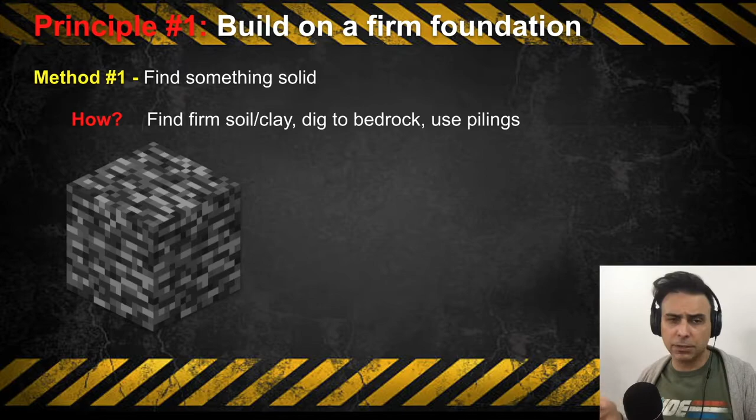So we could dig to bedrock. Oh, sorry, not that bedrock. This bedrock here. And as we can see, we have our layers of soil here. It gets more packed. And then we have our bedrock here. Let me get my pointer up. We have our bedrock here. And this is solid stuff. You can't build on anything more stable than that.

We could take off that top squishy layer of soil and build on the clay underneath. The soil in our area is very clayey. If you ever had to dig into your backyard for a project, it's a pain in the butt around here. But it's nice and firm to build on.

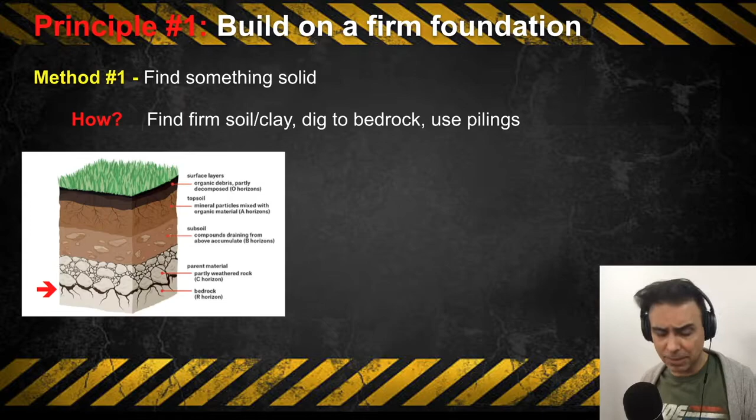Now, the other thing we have are called pilings. So these are pilings. They could either be concrete or metal, or sometimes even wood is used. And if you can't dig to bedrock, you can put these down onto the bedrock and then build on top of the pilings there. And then that force is holding onto that without actually putting the foundation on the bedrock.

Because sometimes the bedrock is under hundreds of meters of soil. There's lots of dead things that have decayed and piled up on top of that bedrock after a couple hundred million years.

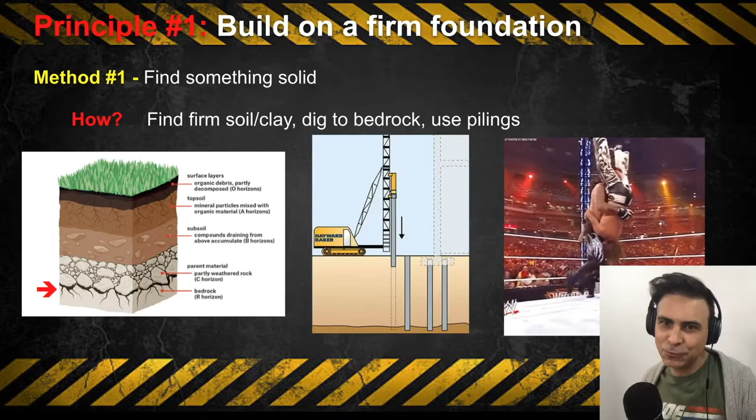So you may recognize the word piling from the wrestling move, the pile driver. This is technically the tombstone, but it's actually a pile driver. And look, here's how it works. You take your opponent, treat them like a pile, and then drive them into the ground. And that's why this move is called the pile driver. If we were in class, I would demonstrate this on a student now so you fully understand what a pile driver actually is.

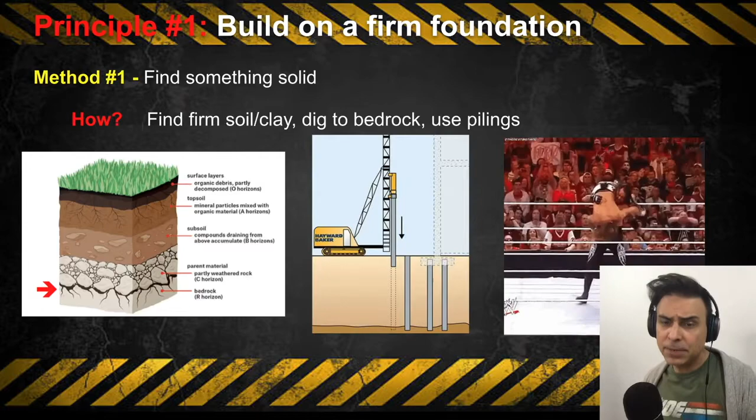But here's a real pile driver in action. They load the piling in here, and they use this pneumatic hammer to go up and slowly, boom, boom, drive it into the ground. It is loud if it's metal, and it takes a good long time because it's only moving maybe 5 centimeters each time. If you've got to go down a couple hundred meters, that's a long way to go.

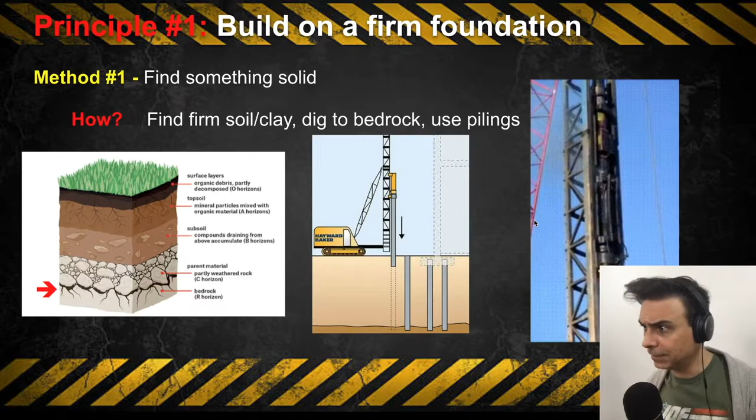So principle number one, build on a firm foundation. The first way you want to do that is just find something solid. Find a solid place to build on. Now, another method you could use for this is to simply make a solid layer. I want to build here, but there's nothing solid to build on. So you could make a solid layer.

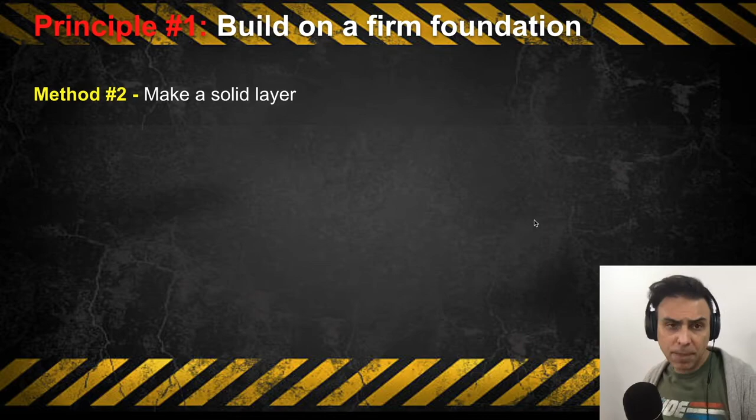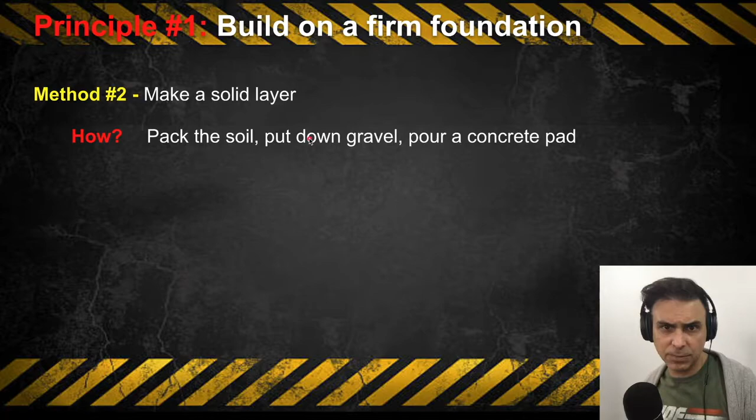How could you do that? Well, you could pack the soil, you could put down gravel, or you could pour a concrete pad. So you could actually make something there. And this is usually good enough for most of the structures that aren't super giant high rises or need to be ultra stable. So we have soil here, but we can pack it down so it's much more compact. The particles are much denser together, so when you step on it, it's much more firm.

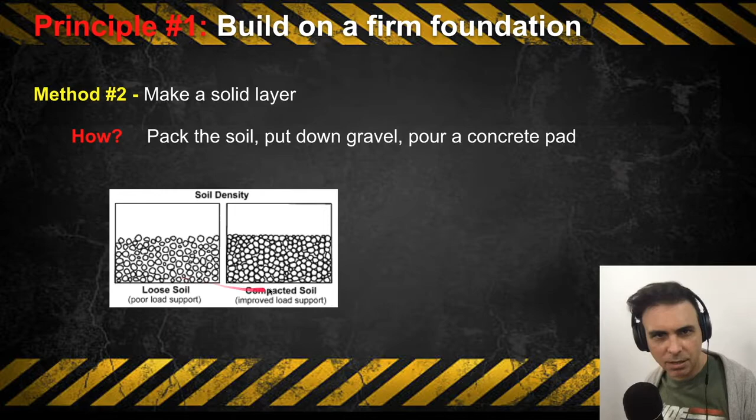It'll hold that energy. You won't sink in. Think of when you walked through a garden around your house and your parents are yelling at you, how soft and squishy that soil was, because it's not compacted. And we have tools that'll help us do that here.

So this is a tool. Look at that. They're compacting that in. No, that's not a Star Wars droid. They're just kind of pounding it down, making it firm, taking out all those spaces so it'll hold that load better. Pouring a concrete pad, very simple. Putting down gravel, again, very simple.

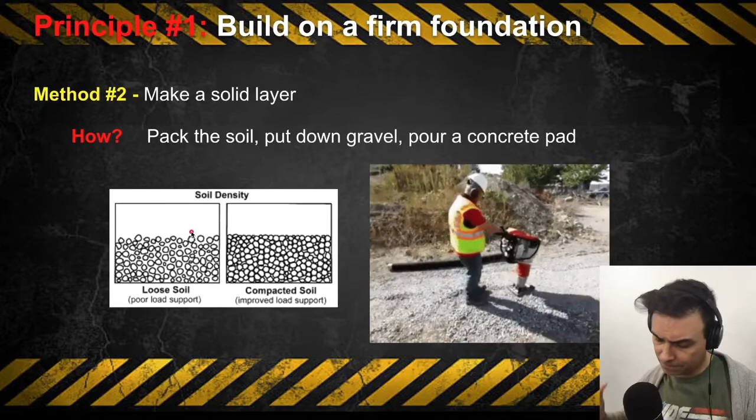And often on top of that gravel, you want to put sand, because the sand will then go in between all the particles and allow for a much more even distribution of the force as well. So that's method number two. Make a solid layer. And then method number three: you want to spread the load.

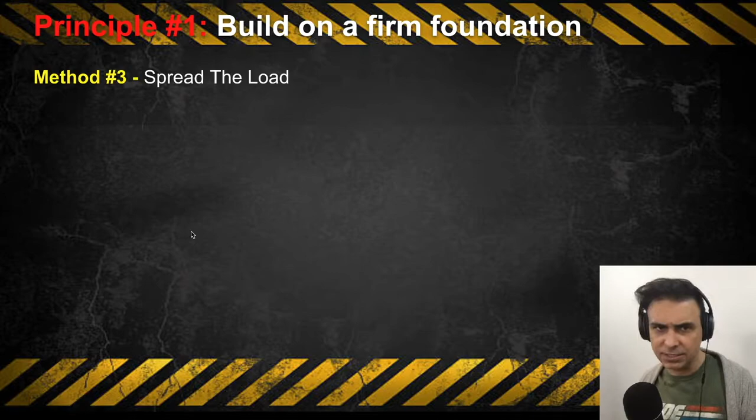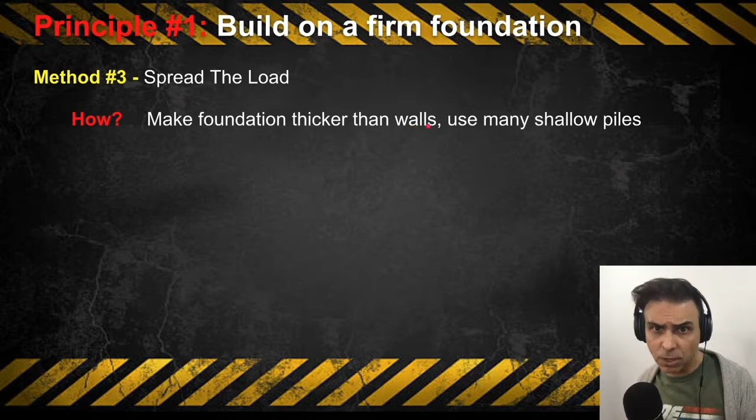This is the most interesting one because the first two you could probably come up with very easily on your own. But instead of having all the force go down to one spot, we could spread it out. So, how do we spread the load when we're building on a firm foundation? We can make the foundation thicker than the walls and use many shallow pilings.

Let me explain. So here we have a wall coming down here to this foundation, and look at that foundation there. See how it kind of spreads over? It'll spread the load. So instead of the load coming down right in this one spot, it's a bigger area that's being compressed.

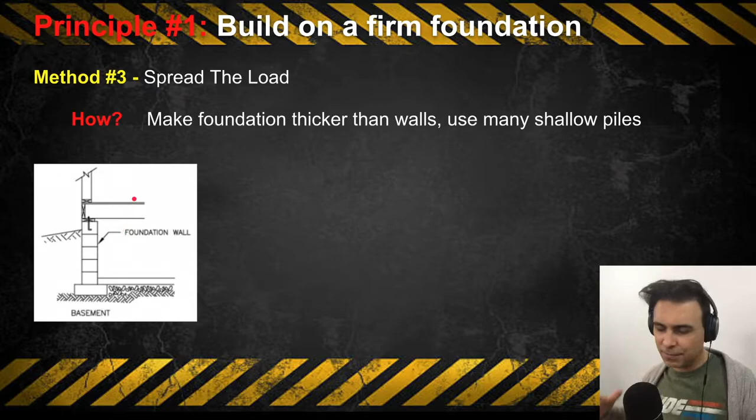And you can think of this, don't you hate it when you're walking across grass in high heels and the high heel keeps sticking into the ground? That's the worst. I hate that. And the reason is all of your force, all of your weight is down to that tiny little point. If you're wearing flats or have a bigger heel, that doesn't happen because the load is being spread.

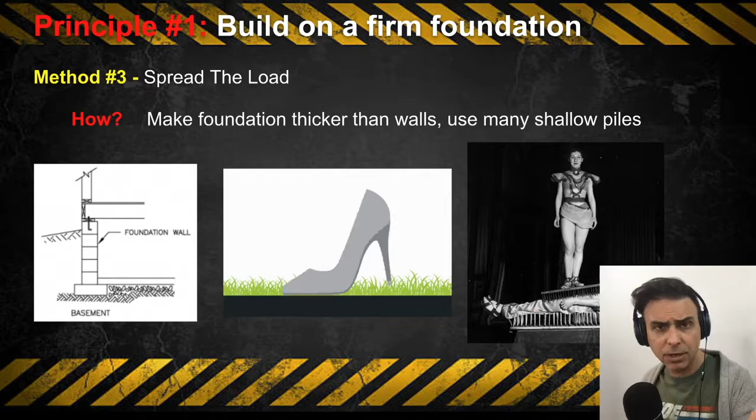And this is the reason why you don't die when you go on a bed of nails. I'm sure some of you have done the bed of nails at the museum in downtown Kitchener. And you got stabbed by 1,000 nails. Well, why aren't you dead? Well, because each one of those nails held a little bit of the weight.

If you asked a young child, would you want to rely on 1,000 nails or just one nail? They'd be like, oh, I don't want 1,000 nails, just one nail. But think of all your force on one nail as compared to a whole bunch. It just holds it. There's no magic involved in that at all. So that's what we mean by spreading the load here.

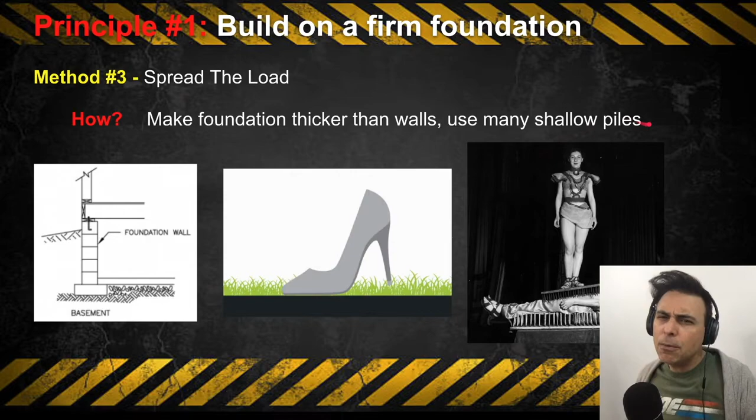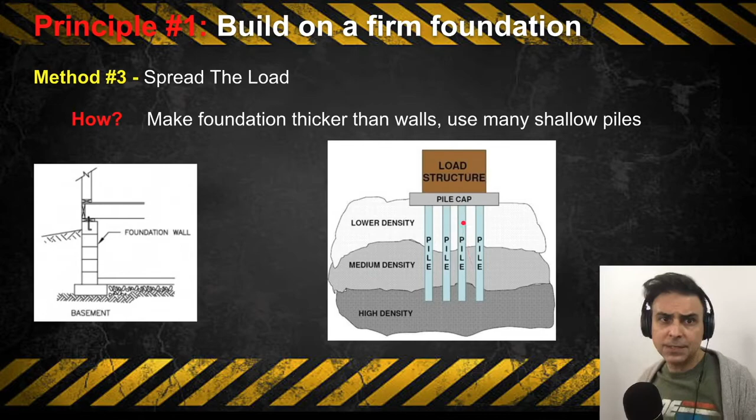But what about this idea of using many shallow piles? Well, instead of going down to the bedrock, which may be way too deep, we can set many shallow piles here to the higher density soil that's been packed a whole lot more. And it'll support it. Not one pile would support all of this, but if we have a little bit of load being borne by each of those, then we can spread the load across those. So that's principle number 1, build on a firm foundation. Method number 3, spread the load.

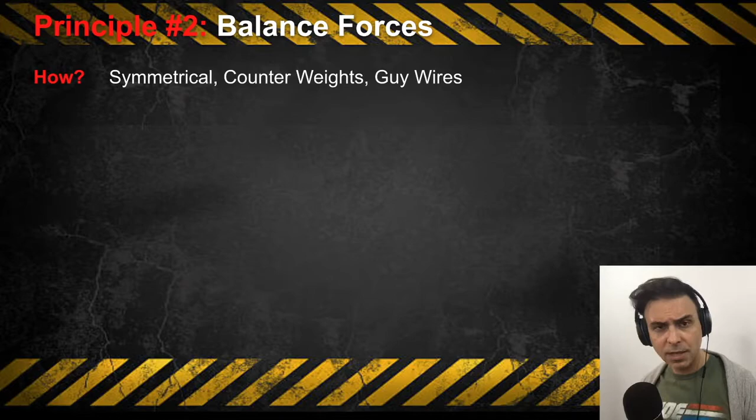Now let's look at principle number 2. We want to balance forces. You want a structure to be balanced. How do we build a balanced structure? Well, we make it reasonably symmetrical. Think about a lot of buildings. They're symmetrical because they will spread the load evenly down there. If we can't do something that's symmetrical, we can use counterweights, or we can use guy wires, not guide wires, guy wires.

So think of the CN Tower. Think of the Eiffel Tower, right? They're very symmetrical structures. They spread the load very evenly here. They don't lean too much to one side. Think of a tower crane. Now, here's the base of a tower crane, not very big.

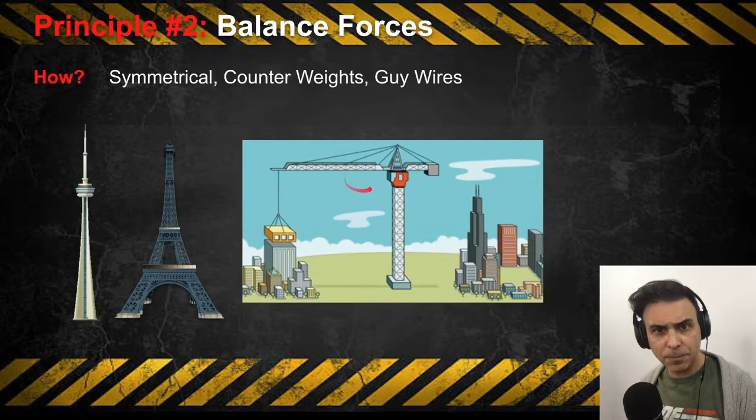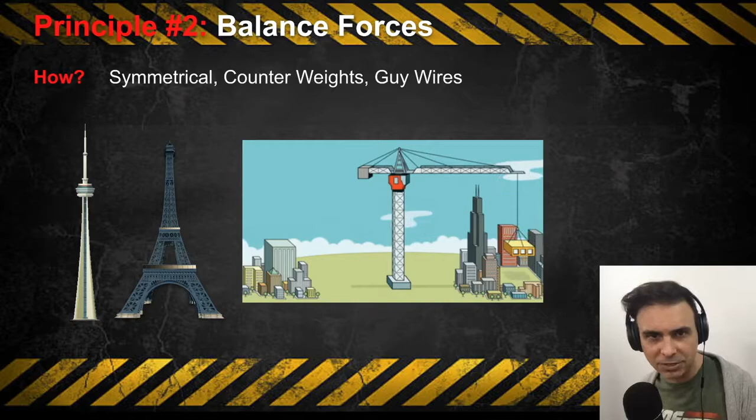And look at the load, look at the weight way out there, right? But look at the weight on the back. The counterbalance will bring the center of gravity closer to the base. In the exact same way when you did the balance challenges, when you bent over to touch your toes, you couldn't do that when you're against the wall because your butt wouldn't be able to stick out. You couldn't deploy your counterbalance to bring your center of gravity back. So we have that counterbalance on the back of that.

Guy wires are another one. If you have a structure that's really tall with a really narrow base here, this is a radio tower here.

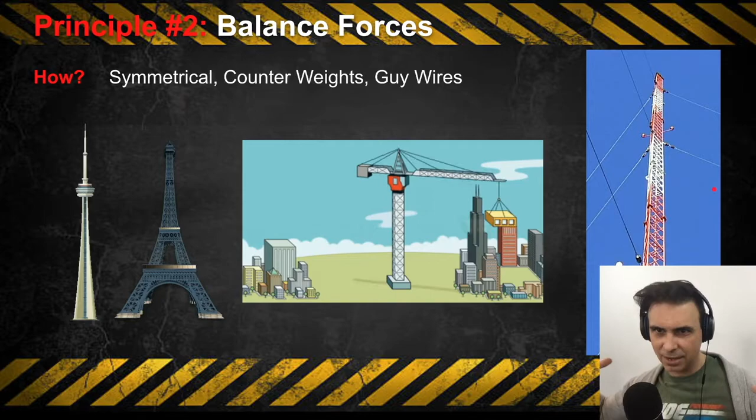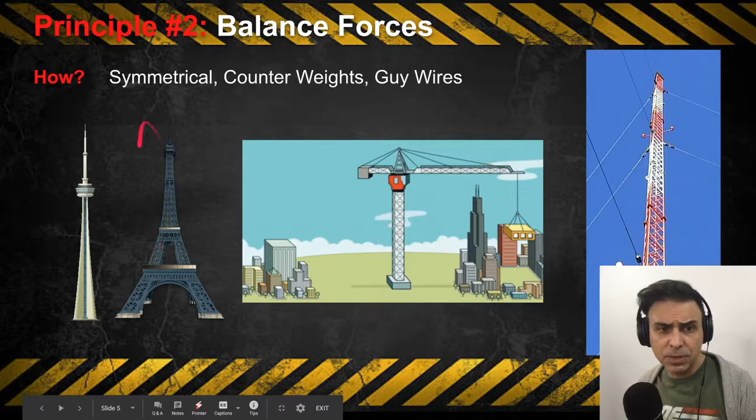Look at all the guy wires coming off of that to kind of hold it and make it stable and balance it. Really what these are doing are kind of like spreading out the base, making the base of this thing huge because the wires go so far, and adding support at the top. We don't need support at the top on the structures over here because they have such a wide base and it's such a rigid and strong material.

A lot of people are confused by the CN Tower. How can it be so tall with such a small base? The CN Tower is actually connected to a gigantic block of concrete underneath it that helps it to be stable. That's its base. We don't see the base of the CN Tower.

And you know guy wires quite well. Those are things that kind of come off telephone poles here with the big yellow plastic protective things, so you don't clothesline yourself as you're biking by. You can see them very clearly. So those are holding. There's one right at the corner on Laurentian when you're crossing the street there. So that's principle number 2: balance forces.

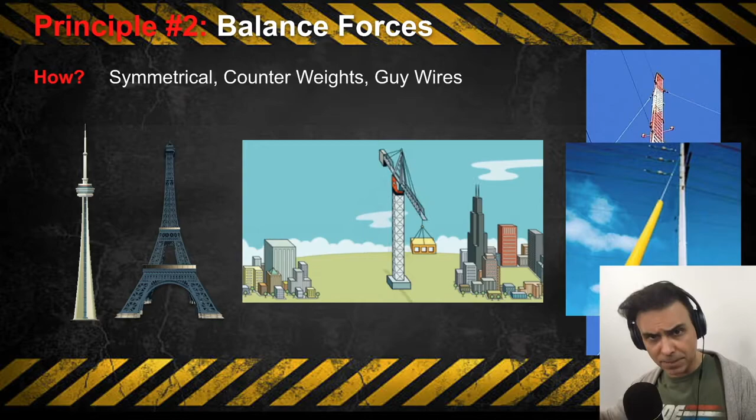Principle number 3: you want to keep forces vertical. Now this is the most complex. Now we're really starting to get into some engineering here. Method: get the force to the foundation as efficiently as possible. So you want to get the forces down to the ground as fast as you can. How can we do that? Well, we can use a truss structure or an arch.

Here, this is what we call a beam bridge. So what's supporting this beam bridge is these pillars here, and they're in compression. And if you were to stand here on this, your weight would have to travel very horizontally before it can get the support it needs. It has to travel horizontally this way. It's a long way. And that's why things like this will bend and be in tension and compression as you get that force on them, right?

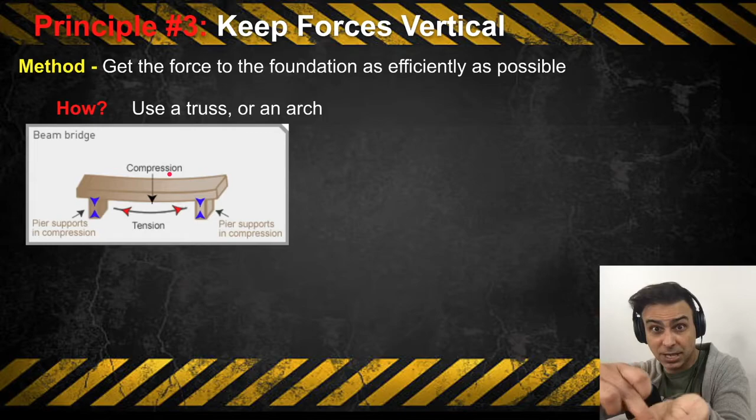Now, not to say a beam bridge doesn't work, but if you're looking to span a very long distance, a beam bridge isn't going to work because you're not keeping forces vertical. They're running horizontal for a great distance before they can get vertical.

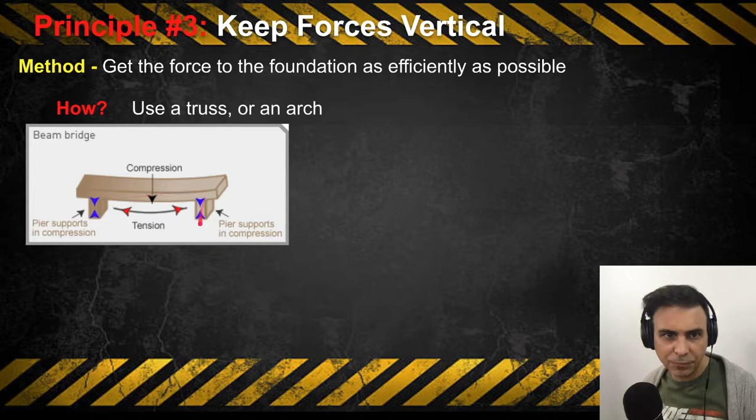This is where the idea of why a triangle is so strong, because it does a very good job of keeping forces vertical. We can't have it go straight down, which would be ideal, but it's keeping the forces much more vertical here. And that's why a triangle is much stronger than, say, a square or a rectangle, because the force along the top of a square or a rectangle would have to run horizontally before it runs vertically.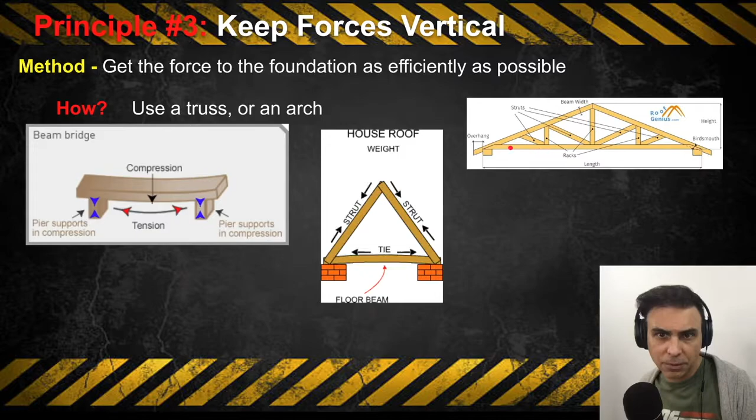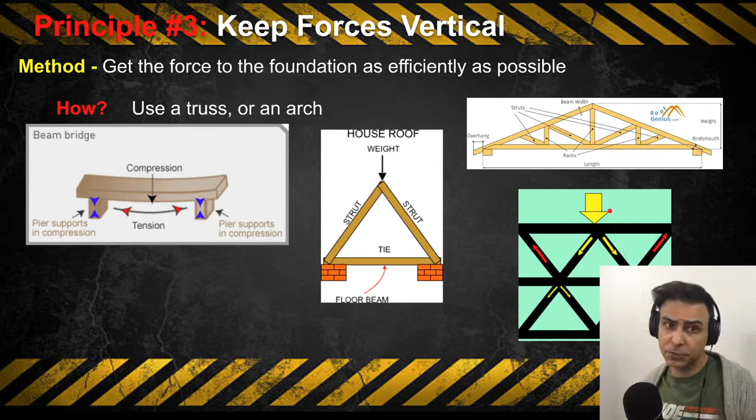Because if it was a force on here, it'd have to travel horizontally, then vertically, or vertically, then horizontally. It'd have to travel all different distances in different ways. So this allows the force to get there much, much more efficiently and helps spread that load out as well by keeping forces vertical. So these are trusses.

And then we have an arch. This is an arch here, and I'm sure you've seen them before, but similar to the trusses, when the force comes down, it spreads it out in a much more vertical fashion. It doesn't have to go horizontally and then down. It immediately starts to move it down. An arch is a very, very strong structure. So that's principle number 3, keep forces vertical, up and down, get them to the ground as fast as possible.

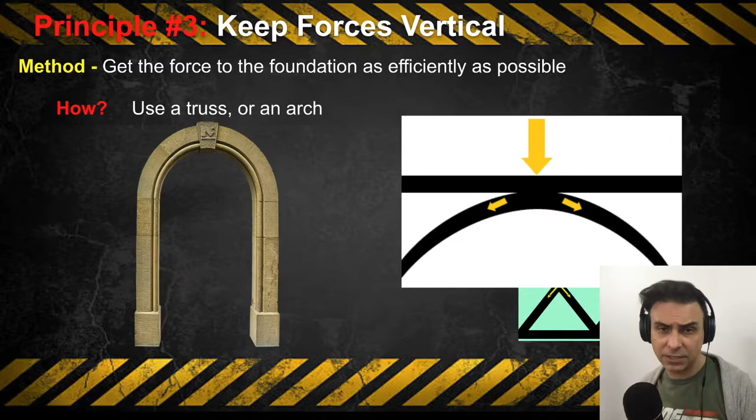So those are the principles of stability, how we can kind of build things to do that. We have 3 primary principles. Now, when we violate these 3 primary principles, or don't pay as close attention as we should, we have a structure that might fail. And we're going to talk about the primary reasons why structures fail. These are kind of very broad 6 categories here, and oftentimes it's a combination of these things that actually cause a structure to fail. But these are the ones we're going to focus on here.

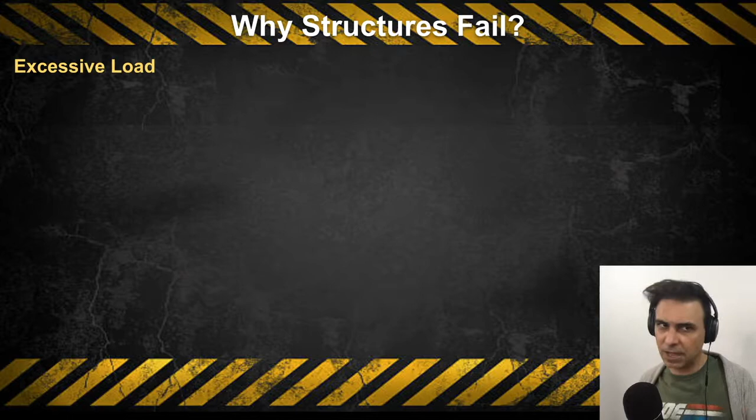So why might a structure fail? Well, if it has an excessive load, you might say, well, there's too much weight, or you kick it too hard, or a tornado hits it. Those are all excessive live loads. That's really what is happening here, when you have too much weight on a structure and it fails.

I went through a lot of the pandas failing gifs to find that one. It was just right.

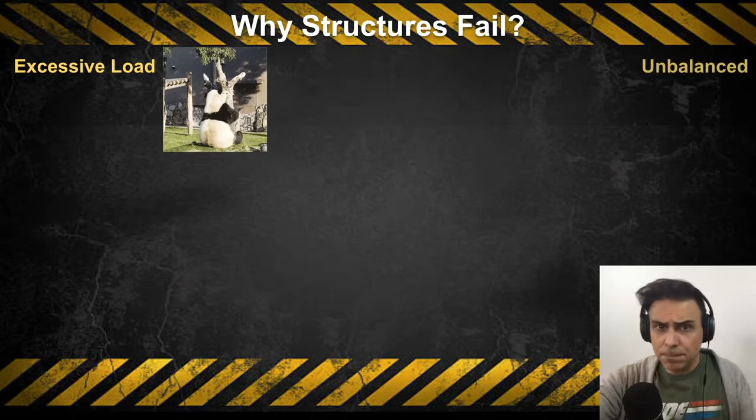Or it could be unbalanced. So if a structure becomes unbalanced, the center of gravity is not over the base properly, or it's not properly counterbalanced, or the guy wires break, it would become unbalanced and then it would fail.

The most famous example is the Leaning Tower of Pisa. They did not build on a firm foundation with the Leaning Tower of Pisa. They thought they were, but they had a foot of clay, but underneath all that was sand. And as they stacked up the big heavy blocks, compression occurred and it squashed that down and began to lean. So the center of gravity is kind of over here on it. It's starting to kind of lean out there.

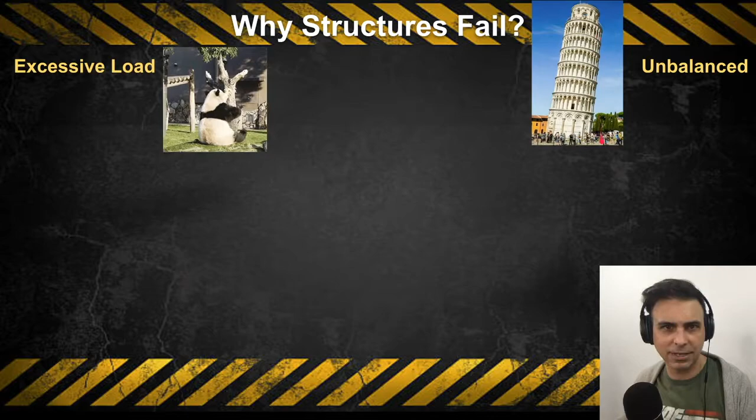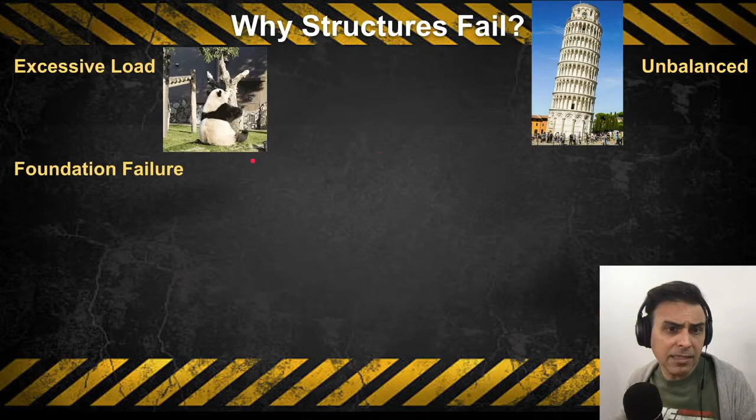And now you can combine those, like an excessive load. You put too many people on one side of a boat, it will become unbalanced and fall over. And then we have a foundation failure. So that foundation begins to crack. It's not quite right there for it. The foundation washes away. So if the base of it goes, that structure is going to come down.

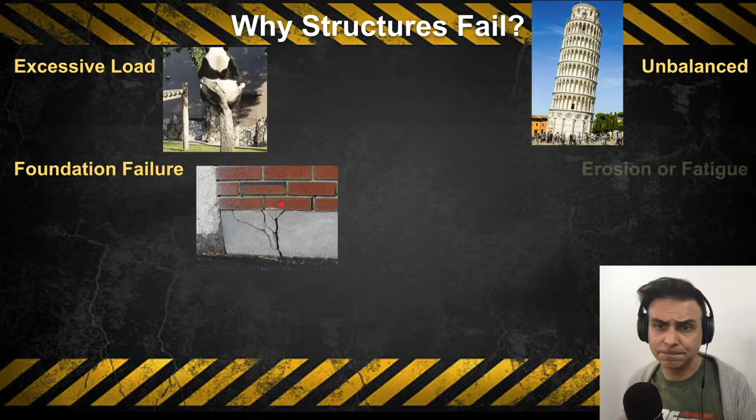And we also have erosion or fatigue. So fatigue, use your French here, fatigue means to be tired, right? These shoes are fatigued. They are worn down. That's where your toe rubs. That's where your heel rubs. So those things kind of wear down. And buildings and structures and building materials wear down over time, and they have to be replaced.

So think about even the wings on an airplane. Whenever it lands, they're extensively checked, every pop rivet, all those sorts of things, because that's a lot of stress and fatigue on there. And then we have erosion. So this is rust, erosion, or corrosion. We have some rust kind of eating away at a pole here, or running water. Water running over a rock will wear it down.

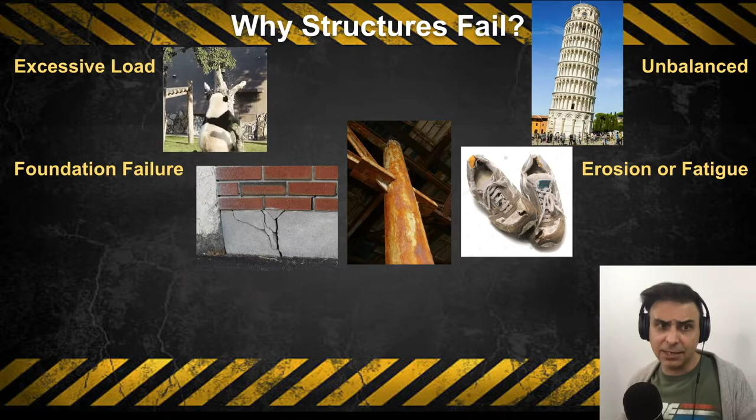If you build by a stream and the stream is running by the base of your house, all that water might wash away the foundation. Then it will have a foundation failure, which will cause it to become unbalanced and fail. See, you can combine these together. Triple failure.

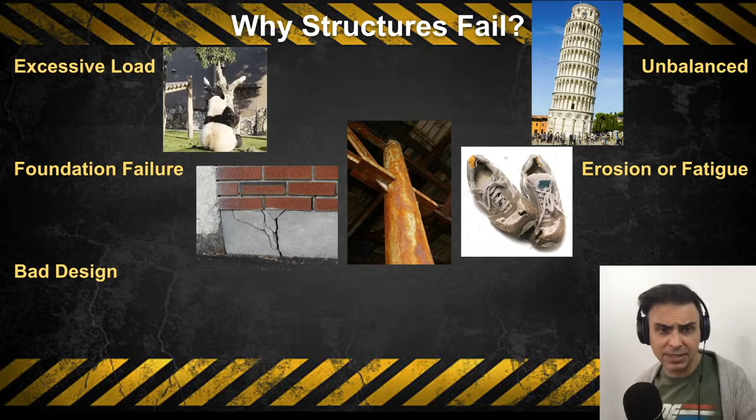We also have bad design. This is one thing that not a lot of people think of a lot of the times. Just if you planned it poorly, or whoever was designing it wasn't trained or skilled or made a major error in that. So, like, very poor design here. That's not going to work so well. Or here's an example of a failure due to bad design. Oh, yeah, that might not be the best thing to use as a permanent foundation there.

And I know at the University of Waterloo, they take this very seriously in the engineering program, because people's lives are at risk if you get these calculations wrong as an engineer, right? So you have to take that job very seriously, because your poor design could lead to a crummy staircase, or it could lead to an entire building collapse because you didn't calculate something correctly.

And then finally, we have faulty construction. So let's say your design was perfect, but then you go to build it and you didn't build it so well. Have you ever built something from IKEA or a piece of furniture that you ordered and you're like, look at this, I have 18 extra pieces? No, you don't. You just built it poorly. So here's someone laying brick, and that's not a very good job.

So the question is, why would you hire someone who is unskilled to do that job? Well, it's cheaper, right? You want to save money. Hey, I'm a big fan of saving money, but if you're hiring unskilled labor, then that means you're most likely not going to get the job done properly.

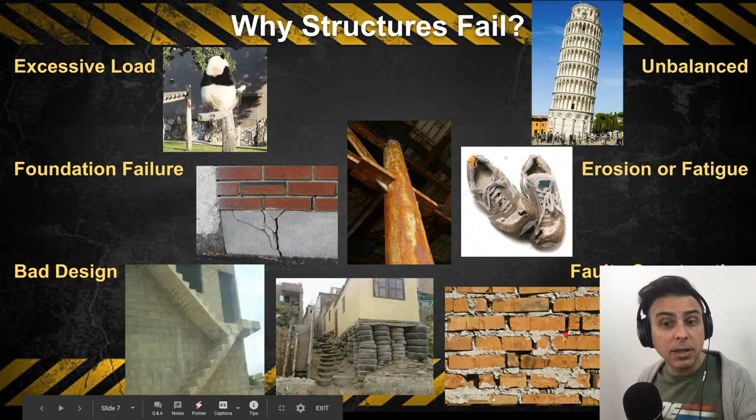And then also, yeah, it sucks paying a lot of money to get a good job done right, but then you've paid that person a lot of money, which is a good thing for that person. So then they can provide things for their family. They can not live in poverty and things like that. So there's nothing wrong with paying someone well to do a job well.

So these are why structures fail. As I said, you can combine these together too. And so make sure that you go through this thoroughly. We're going to apply your knowledge in the next one and see some pretty crazy, just absolutely crazy structure fails.